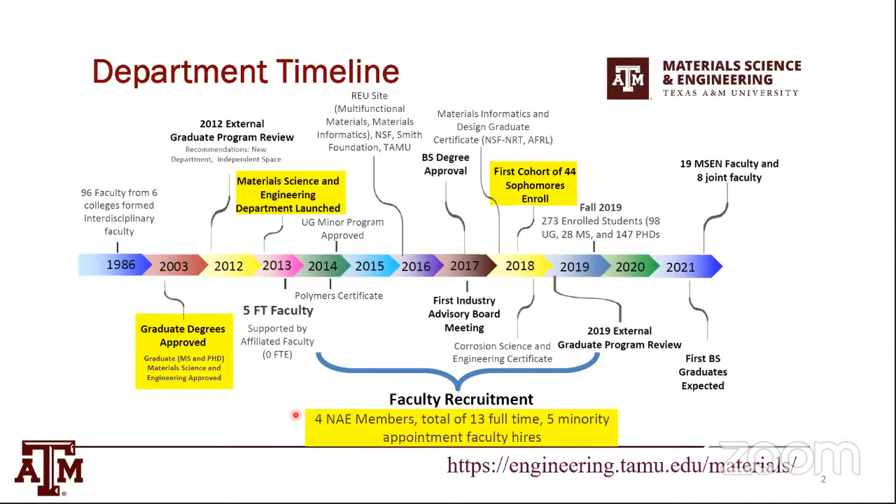Moving on, we have a plethora of research fields of interest to any graduate student: structural materials in the mechanics community, extreme materials for extreme environments, and computational material science, together with experimental mechanics at a smaller scale, largely led by Dr. George Pharr since he joined our department.

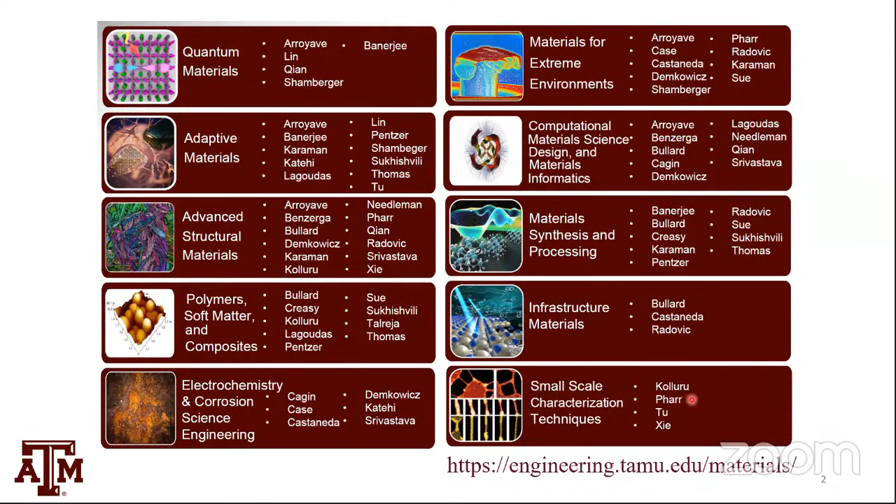As of fall 2019, we have a good mix of undergrad and PhD students, so it's a very research-oriented department with an equal mix. We're now ranked 14 in the graduate program as per US News, among public universities.

As the saying goes: from the outside looking in, you can't understand it. From the inside looking out, you can't explain it. This is pretty much what we know about fracture.

With this statement in mind, I'll summarize what I understand about fracture as an introduction, for maybe one person in this audience who is not actively involved in fracture. So, a simple fracture story.

Let's consider a blob of material, a piece of gray metal or any material that has a crack in it. Fracture mechanics basically says I've got a bad guy, the driver trying to open the crack, and a good guy sitting inside the material trying to resist the crack growth. In Star Wars terminology, I've got the Emperor and I've got the Resistance.

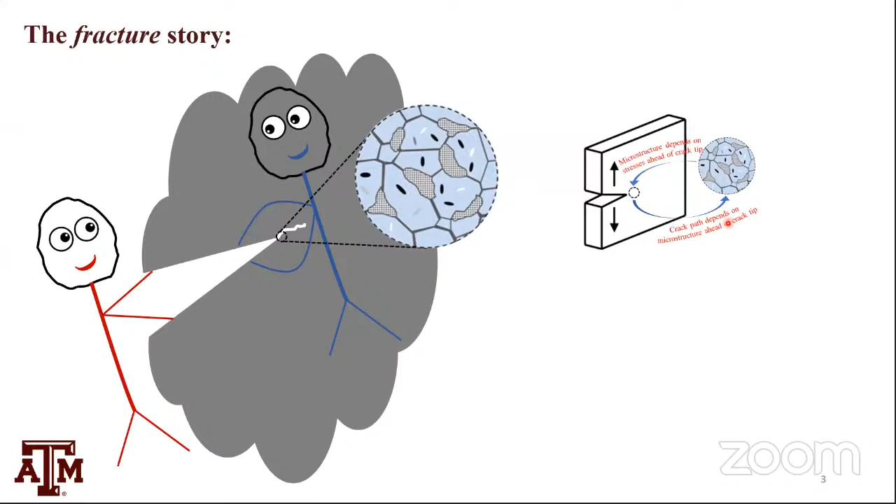So it's a coupled cycle. Which one is affected more will depend on whether we get more resistance or it becomes easier for the crack to grow. More often than not, we know from a material science perspective that a crack in the material follows the microstructure. So microstructure has many roles; it also makes the crack grow in certain ways.

So if we look at it this way, the microstructure is helping the bad guy because there are features that allow the crack to grow easily. But there are also features in the microstructure that trap the crack or move it around. This isn't my idea; it's been around for a long time, through 100 years of fracture mechanics. At least for the last 60 years, everybody has realized the role of material microstructure.

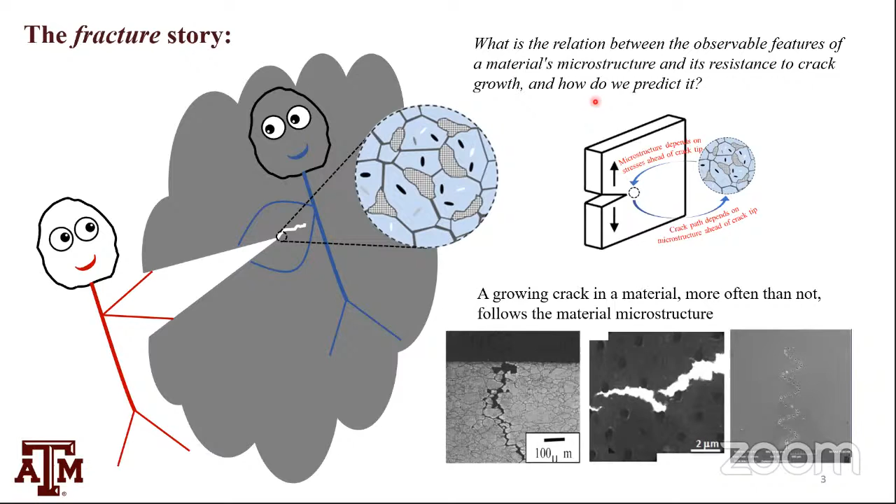So what is the relation between the observable — meaning relevant features of a material's microstructure — and its resistance to crack growth, and how do we predict it? The 'how do we predict' part isn't anything new for what I'm about to present. It's been there; all I have is better computers and better codes to run these calculations. So how do we do it?

Finite element, well known, has been around for a while. What we're going to do is take a specimen, a small scale, mode 1 small scale yielding boundary value problem. I'm applying a loading condition representing mode 1 small scale yielding. I've got a notch and a small region where I'm going to model the material microstructure.

What I'm going to present is a simple microstructure. Either I have these inclusions, tiny particles that nucleate voids, or I have a nice distribution of grain boundaries, and the crack is driven by the grain boundary — that's intergranular fracture. Or in this case, it's inclusion-driven fracture. The matrix of the material is isotropic, elastic-plastic.

The method we're going to use is finite element explicit. We take this, put it into the finite element code, which follows the dynamic principle of virtual work — so, finite element explicit. Why explicit? We're interested in quasi-static behavior, but we use explicit because we're going to simulate crack growth, and it's not easy to make an implicit code converge. So we go with the dynamic principle of virtual work. As long as we follow things correctly in the explicit calculation, we get a reasonably convergent result.

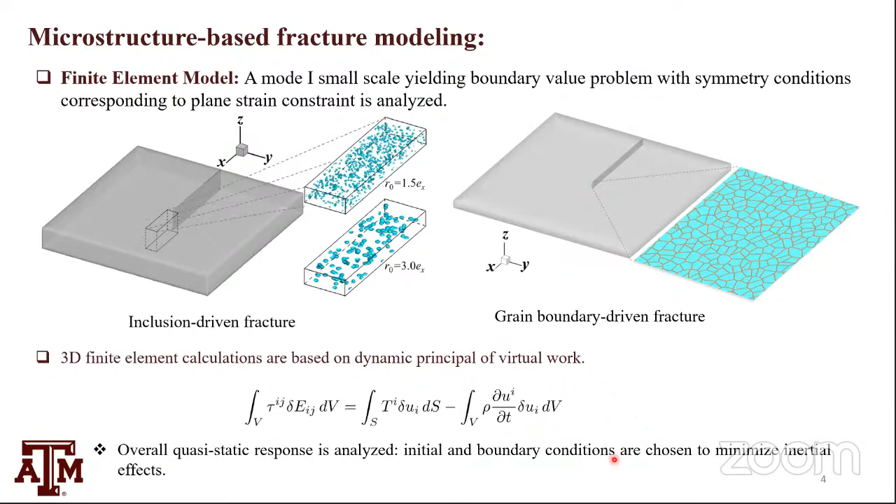Since we're doing dynamic calculation, but we're interested in quasi-static fracture, we apply initial and boundary loading conditions such that it minimizes inertial effects, which is basically the wave effects. So we got the method, we got the model. Now we need the constitutive method.

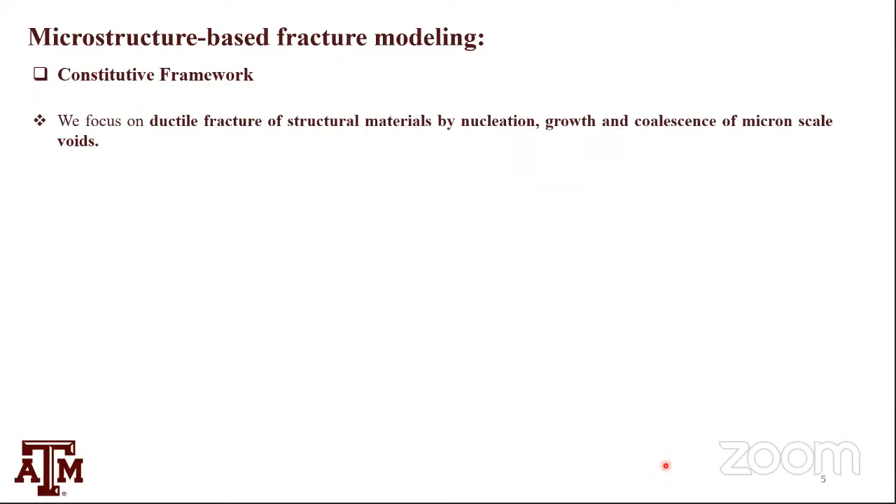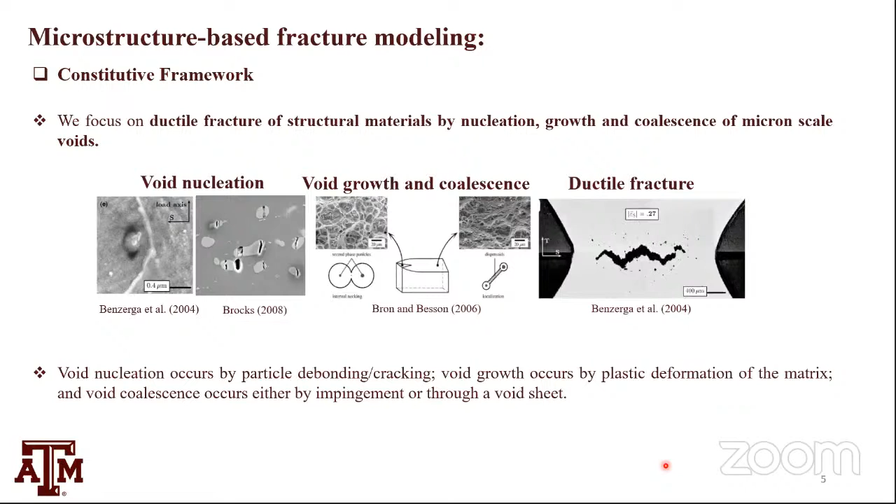So for the constitutive framework, we're going to rely on ductile fracture modeling. This is what I do. We're going to focus on void nucleation, growth and coalescence, and that leads to formation of a crack. So this is the basic premise. And how do we mathematically write it?

It's not new. It started with Fred McClintock and Rice and Tracey's seminal work, analyzing the growth of an isolated void in an infinitely large medium. Later, this was put in terms of a flow potential or a yield function by Gurson in his PhD thesis under supervision of Professor Rice. Once Gurson finished his thesis, two people, Viggo Tvergaard and Alan Needleman, took the Gurson model and put it in a finite element code. In the 80s, they modified the Gurson model, which is now referred to as the modified Gurson model, or also known as the GTN model, Gurson Tvergaard Needleman model.

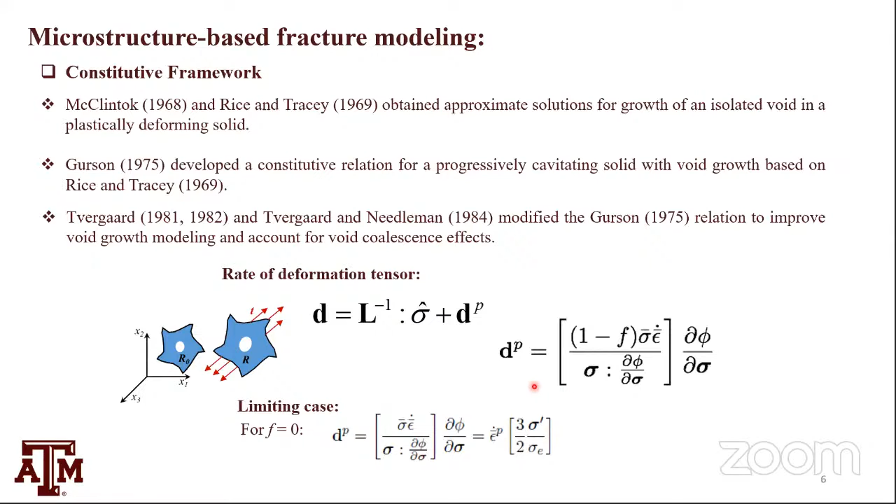Basic, simple idea: we have a material, a pore in it, and for the deformation we apply a boundary value traction or displacement, and we divide the deformation into two parts, elastic and plastic, not a big deal. We're going to modify the plastic part to account for this variable F, which is the porosity or void volume fraction coming from nucleation, growth, and coalescence. This could be also pre-existing in a material. Phi is my flow potential, Mises effective stress, and epsilon bar dot is the strain rate, the effective plastic strain rate. If F goes to 0, this reduces down to a simple von Mises material. So F goes to 0, dP reduces down to plastic strain rate in a von Mises, isotropic von Mises material. All right, how does the void evolve?

The void volume fraction's first part follows mass conservation. Then there's a second part, introduced by the work of Chu and Needleman, that introduces nucleation of voids. So you have this discrete microstructure feature that nucleates voids, these voids grow. This gives you an early jump in the voids, and their further growth follows mass conservation. The flow potential, as was written by Gurson, is here with Qs introduced by Viggo Tvergaard.

This last part is what makes fracture possible from these models. What we have is that this depends not on F directly, but on a pseudo function F star, which is simply the void volume fraction coming from growth and nucleation. But nucleation in a way violates mass conservation, but let's keep it there. F enters here, and the flow potential starts to shrink. When F grows, the flow potential starts to shrink. And if F is greater than some critical value, then this growth of F star becomes asymptotic or near asymptotic, causing the collapse of this yield function rather rapidly.

Before we go on, simply, if this F star goes to 0, you reduce back to a von Mises flow potential. This is actually a flow potential, so I should not have used an equal-to-0 sign, but we have it there, like a yield function.

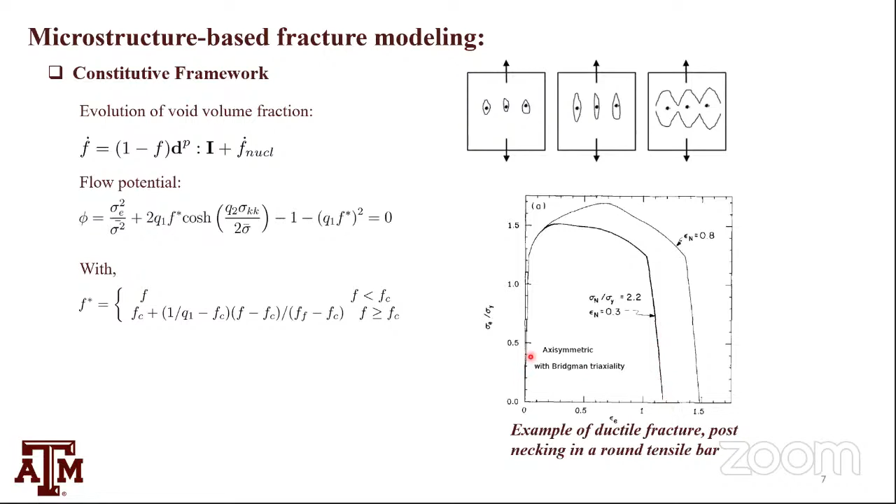So when the yield function starts to collapse, just visualizing it in a simple uniaxial tension term: I have elastic behavior, yielding, strain hardening, ultimate tensile strength, then necking in an axisymmetric bar. Then I have this damage region where the voids start to grow. I reach a point where the majority of material points have reached F greater than Fc. My yield function starts to collapse rapidly and the load bearing capacity drops rapidly, which basically mimics the creation of a new free surface, or fracture.

So with that, I need one more thing: the definition for plastic strain rate, which is a simple power law. It's a very common one. And hardening is, again, a simple power law, metallurgically very old. So we put these two things together, easy.

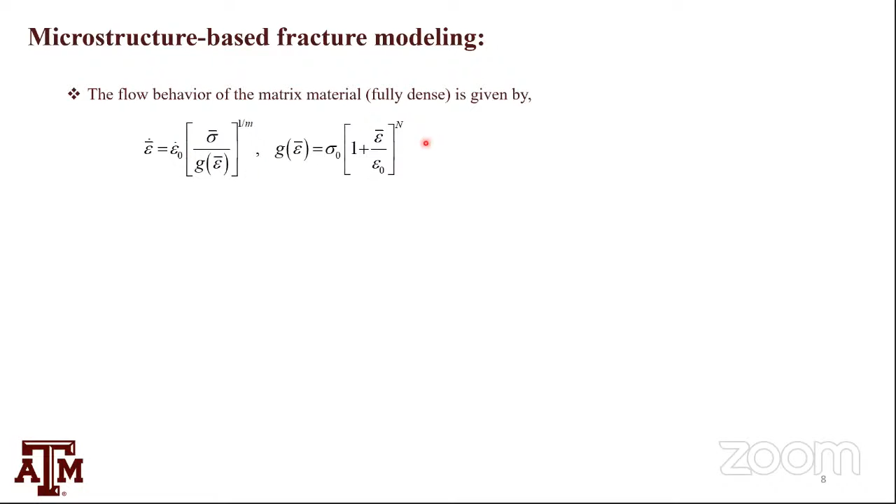Now I need a nucleation criteria, because if I have a microstructure feature, it might not have a void initially, but it may nucleate a void as the deformation proceeds. So I have a material, I have microstructure, and the nucleation criteria follows two relations. Either nucleation can come from accumulated plastic strain, as shown in this material, or nucleation of voids can come from a hard particle or a soft particle.

One follows around mean strain. I have a mean equivalent plastic strain. If I reach that value following a half Gaussian distribution, I nucleate voids. Or, based on stress, I have this driving force: effective stress plus hydrostatic stress.

In summary, it's a scalar measure of the maximum principal stress, a very approximate zero-order approximation, but it gives you a driving force for stress-based nucleation.

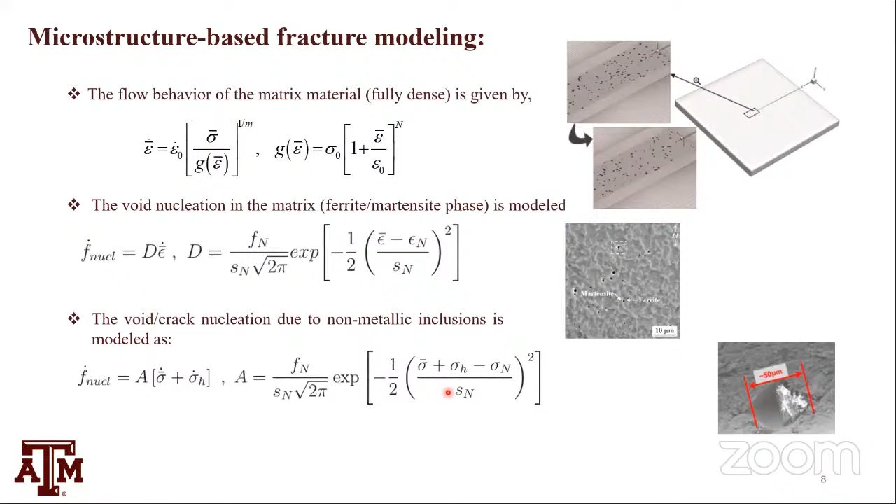With that, it's done. So now in a simple way, I will show Okay, this is, once I have pointer on, it doesn't work. So I need to go back to, all right. So some simple simulation results.

So some simple simulation results, focusing on the small box. I have an inclusion, a notch here, and the crack starts to grow. We can do this for different inclusion sizes. These sizes show double the initial size, and EX is the mesh size.

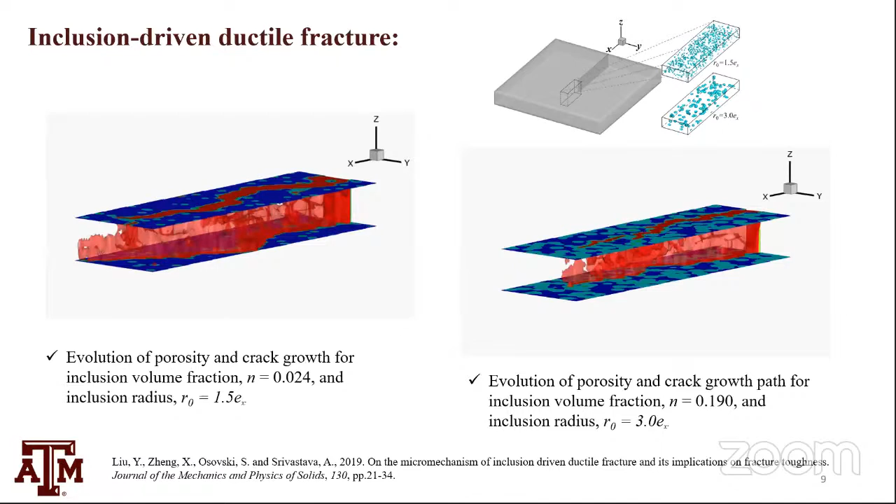We have a volume fraction of around 0.19, a pretty large volume fraction, and we can simulate these three-dimensional crack growth paths. From these calculations we get the JR curve, or crack growth resistance curve, where J is the J integral, the driving force as a function of increment of crack, delta A. Because we're imposing the K1 field directly, we can follow Rice's criteria to get J and plot J versus delta A curves for all these cases.

So we can estimate the crack growth resistance curve like one would in ASTM or simple experiments. These are thin slices of material, but the front and back face of the specimen were under plane strain conditions, so despite the 3D microstructure, it's still overall plane strain. That allows me to define a J1C.

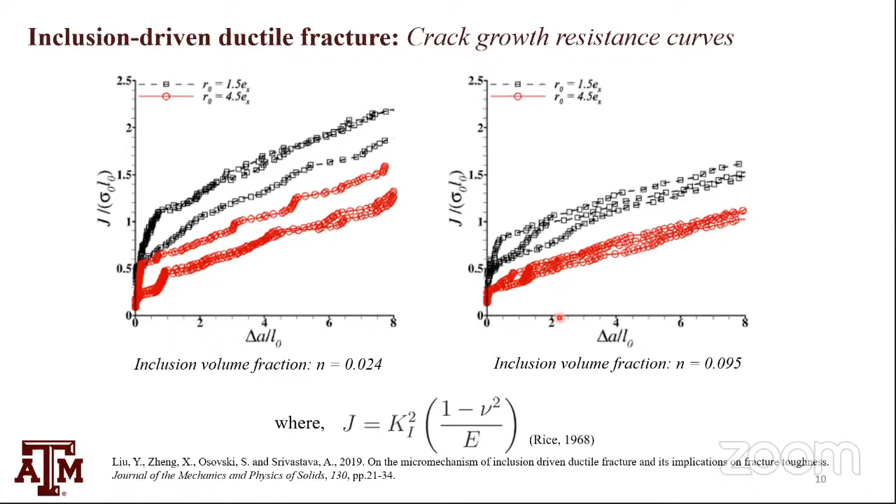I take the J delta A curve, mimic an ASTM standard by fitting a power law, drawing a line, and getting an offset. That gives the crack growth initiation toughness, the J1C value. I can then plot this data against microstructure parameters, correlating crack growth initiation toughness with volume fraction and size of inclusion.

Here is a set of experimental results from multiple ductile materials, not just one set of material. Our model wasn't calibrated at all to match any of these. This could be serendipitous, but it's exciting that the results predicted by the calculation show realistic comparison with experiments. These experimental results were summarized in a paper by Professor McMeeking. So we get a nice, realistic inclusion-driven fracture simulation.

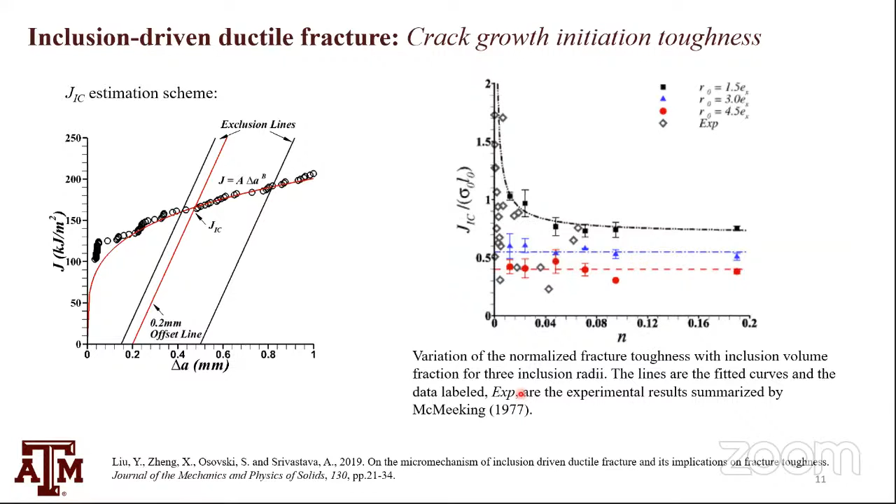Moving on, this microstructure-based approach can also analyze scenarios like microarchitectured materials. This work was experimentally done by St. Pierre when he was a PhD student with Vikram Deshpande at Cambridge. He took a slab of aluminum, drilled a bunch of holes, used a laser to put a notch, and did a 3-point bending fracture test, with one hole or multiple holes. We did the finite element simulation to see if we have a J field and can define fracture properties.

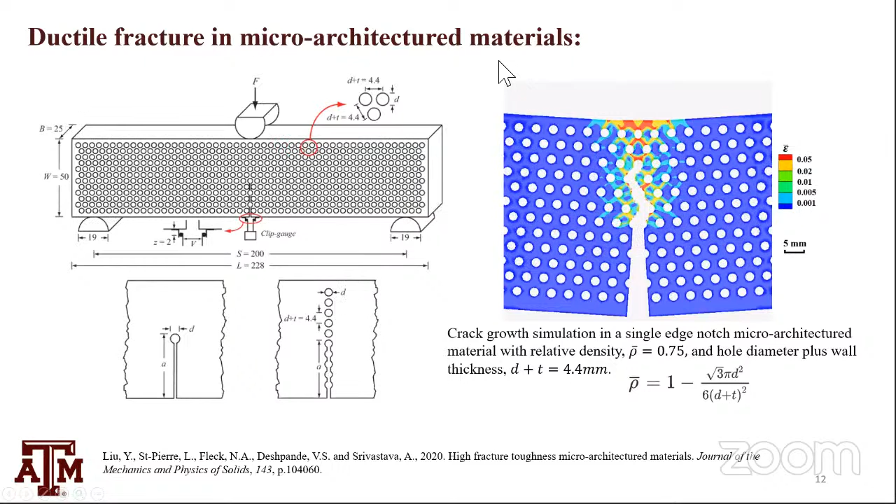So here is a simulation result. We can easily model these voids discretely and let the crack propagate, then plot values with respect to hole diameter and spacing, in a single row of holes and in a hexagonal row of holes, which is the microarchitecture material, looking at its fracture toughness.

In this case I'm comparing results with experiments. This is the single hole case: solid symbols are experiment, and the two open symbols are from applying the ASTM standard procedure to our simulations to calculate KJ1C fracture toughness, or directly measuring by drawing a contour and computing the J integral. Since these are 3-point bending tests, I don't have a K field imposed a priori, so I can't directly compute J, but I can do a simple contour integral. Either way, we get a very nice comparison with experiment for both single hole and row of holes.

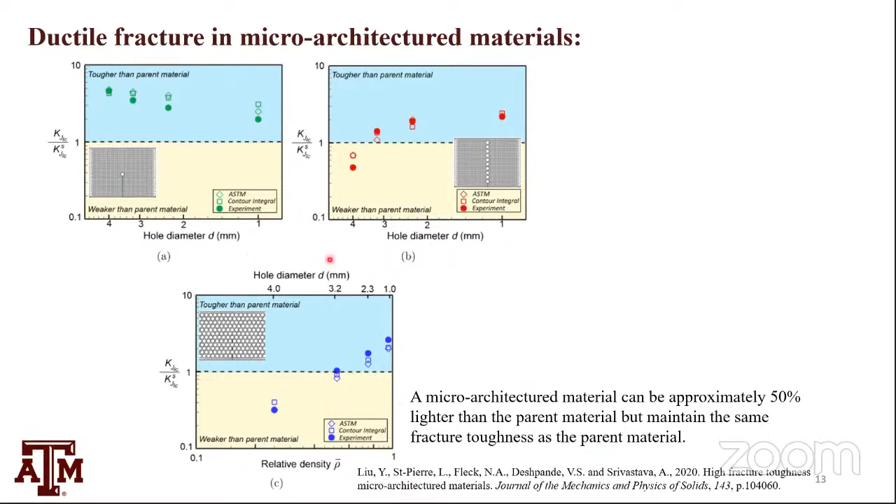In the microarchitecture material we get a nice comparison with experiment, actually slightly better than what we got for single holes. We showed that with this microstructure-based modeling, we could design lattice materials, or architected materials, that are 50% lighter than the parent material but maintain the same fracture toughness. The denominator here is the fracture toughness of the parent metal, which was aluminum 2000 series.

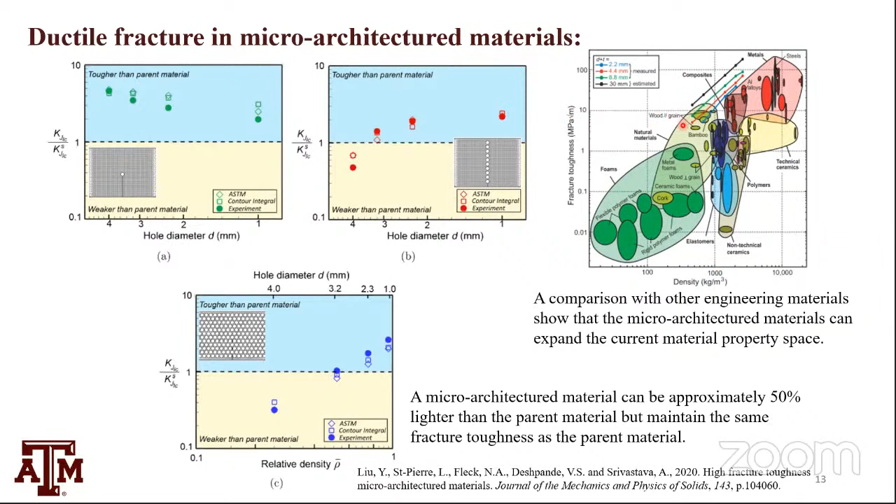Now we can plot a simple Ashby map, where the lines represent our lattice, our microarchitecture material. You can have a material with density less than that of water, 1000 kg per meter cubed, and a fracture toughness greater than 10 megapascal root meter. That was pretty neat in this case.

We also did grain boundaries. We're talking about grain boundaries now. Those holes were a bit of a sidetrack, but we also can do grain boundaries. We focus on metastable titanium beta alloys, where we can simulate crack growth.

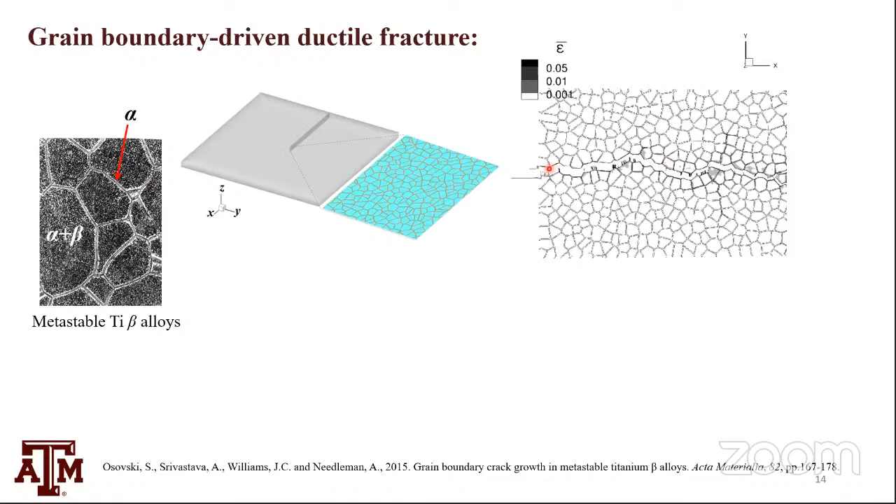These hair-like features are visualization errors, so we just ignore them. And we get realistic crack paths like what you would see in experiments. The crack follows the boundaries of the prior beta grains, basically along the alpha grain boundary.

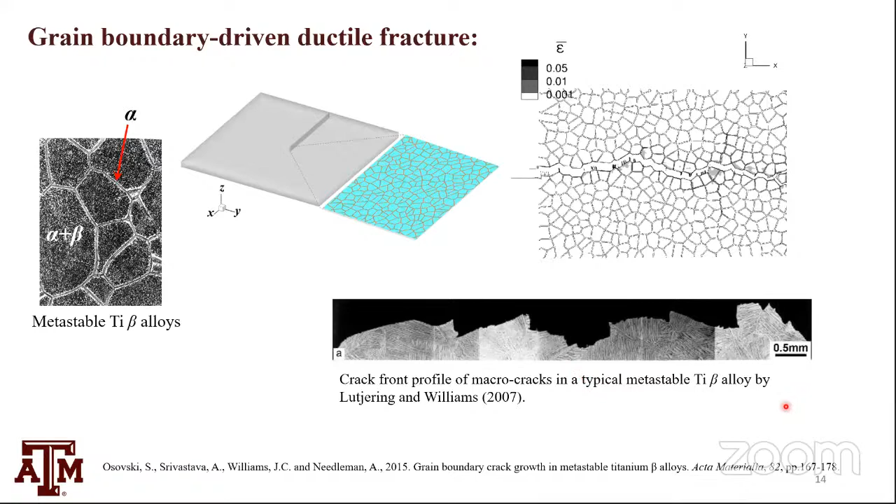We could extract a J delta a curve from this simulation, and get the tearing modulus, which is nothing but a normalized slope of these curves, plotted with respect to strength of the grain, because strength of the grain is something we can control. We can change the precipitate structure in a grain, and in experiments make grains with different strength, and by increasing the strength of the grain we can increase the overall strength of the material by designing the precipitate. But when we increase the strength of the material, we lose something.

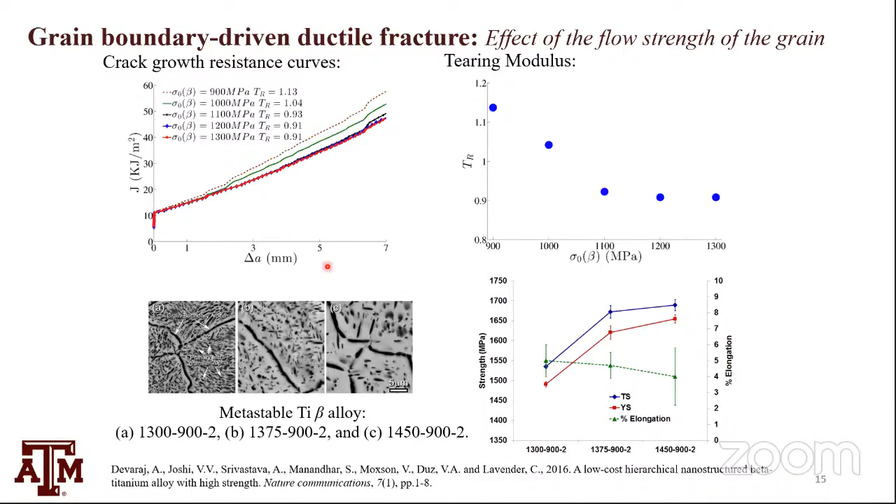So these also provide a nice qualitative, realistic comparison with experiments and inform us. We did this simulation before we did this experiment with Pacific Northwest National Lab.

All right, so simple summary with the microstructure fracture modeling takeaway. The microstructure-based fracture modeling can provide realistic - I say that in quotes because we never really tried to validate these - but it looks realistic, provides a scaling relation, and provides a way of designing.

So realistic prediction of fracture behavior from the material microstructure and material properties is not directly possible if you apply the widely popular, and actually not just popular but widely successful, engineering fracture mechanics based approaches. You can't really get microstructure insight. These methods are not that popular, they're hard and not straightforward, but they seem to have promise.

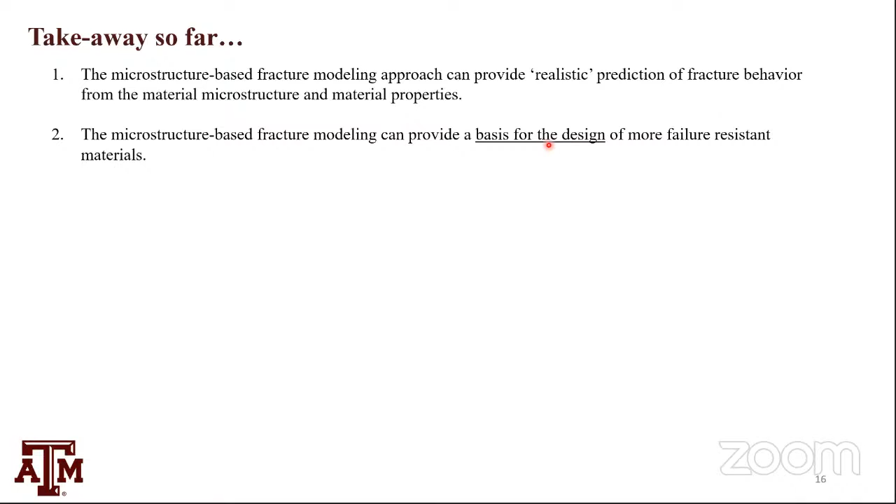These can also provide a basis for designing material, as we saw in terms of grain boundaries, strength of material, and microarchitected materials. Moving forward, we have seen a lot of advances in design methodology.

Basically, the idea of the holy grail of material science is: a designer gives me a target performance matrix, and I come up with a material that meets that performance matrix. That means I've got to solve an inverse problem.

Now, a lot of focus has been on improving elastic modulus and yield strength of the material, nothing much, and nothing on high toughness. The few papers on this topic focused on getting, in a homogenized sense, how much volume fraction of inclusion I should have.

But there is little work done in that regard, largely because optimizing microstructure to enhance a material's crack growth resistance requires optimizing the topological features of the material microstructure.

Now, topology optimization is not a new thing. It has been around for a while in the aerospace field and in civil engineering, but those topology optimization approaches are structural topology optimization.

Now, the question would be, in terms of a computational mechanics person, what's the difference between structural topology and microstructure topology? Not much. The only problem is that it's just too complicated at the microstructure scale, because the constitutive models are complex, modeling requires very fine meshes, and it becomes rather complicated, meaning the calculation becomes expensive and not really realistically doable.

So we cannot really use the microstructure-based fracture modeling I've shown so far with any of these optimization schemes, which are generally iterative, to solve this problem and design a material with higher or enhanced fracture toughness. It just becomes unrealistic. So there is a need to develop a computationally efficient fracture modeling scheme to correlate material microstructure and its crack growth resistance.

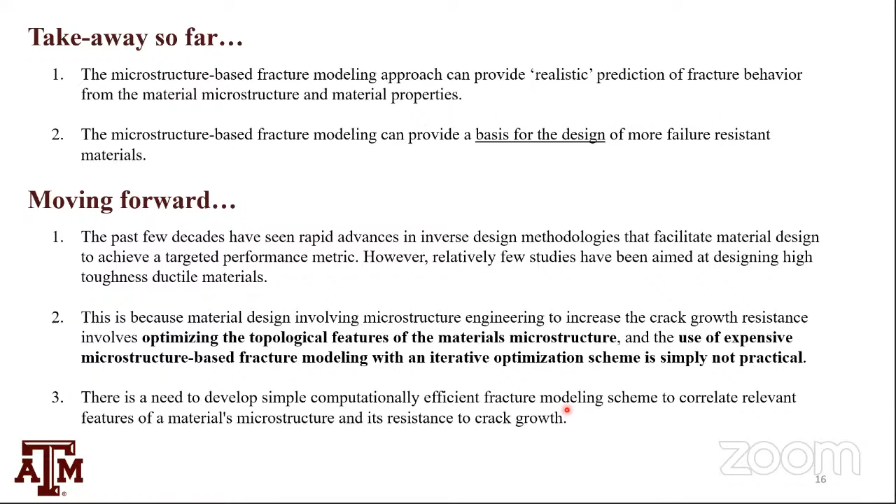So that one could really use it in designing. And also, these microstructure-based calculations are only accessible to people who have optimized codes and access to good computational resources.

As I talked about before, simple and intuitive: cracks follow microstructure. So all we need to do is find the crack path and estimate the energy invested in following that path. That's all we need to do.

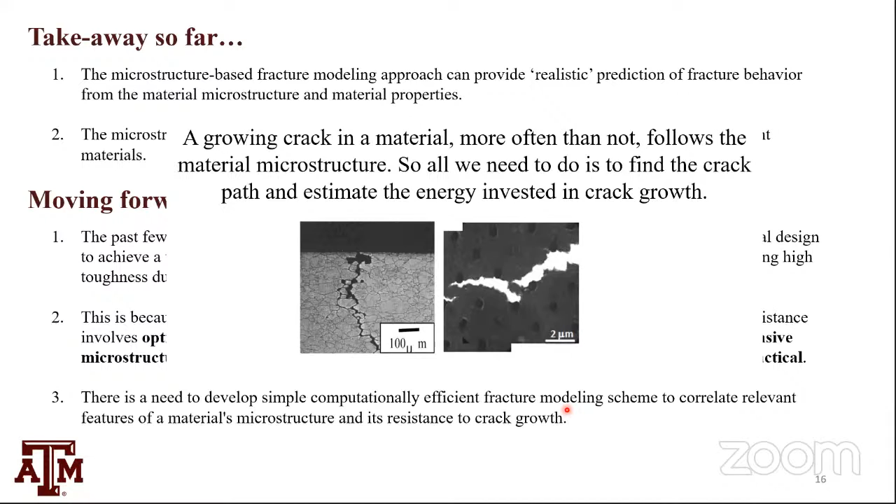So do we really need to follow the full-field boundary value finite element problem? Maybe, maybe not, but it seems like you can get away with just doing a path search. So how do we do a path search?

We picked the North Gate canteen, which is at the entrance of BARC, at the gate of the Bhabha Atomic Research Center. So we go from North Gate canteen to Gateway of India. Plug in these two locations and Google Maps gives me a path. Done - pretty easy, straightforward. It also tells me the shortest distance path, depending on the features you have in your Google Maps app, shortest time path, and estimated time of arrival.

Now, the total time taken, the estimated time of arrival, is analogous to crack growth resistance. The time comes from the resistance itself, which is like traffic.

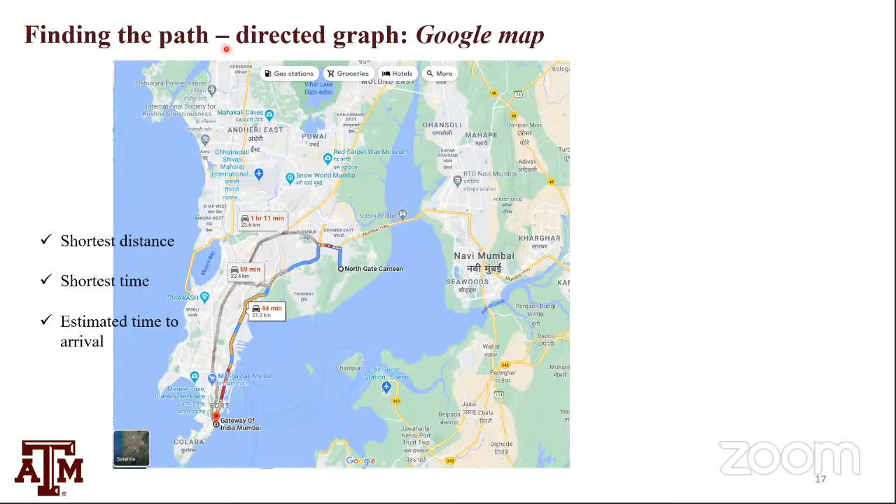I have a well-defined network of roads. Google Maps just picks the path - if you put a time biased path, it does a weighted directed graph. If you just ask for shortest distance, it does a directed path. So Google Maps can do it, we can do it. All we need to do is find a path.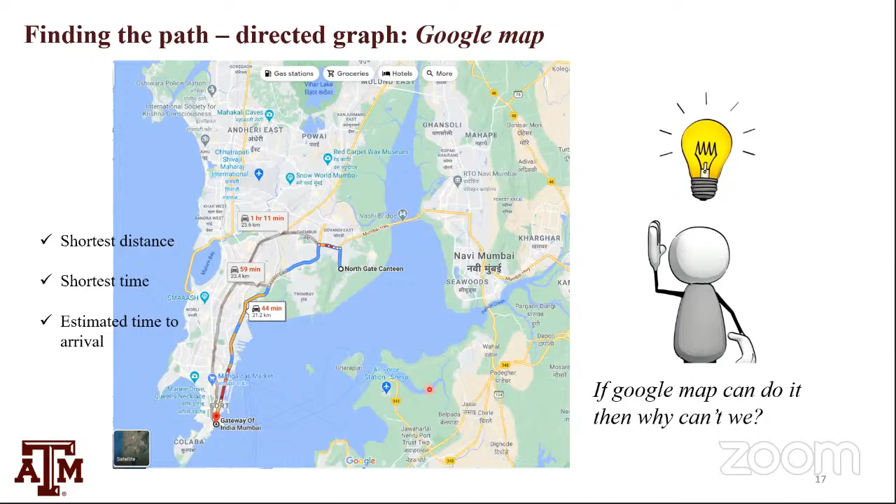So let's see what are the challenges in actually mimicking a Google Map for fracture. Here is my small scale mode 1 problem - it's a large level specimen, small scale loading. I've got a notch, I've got a material here.

Remember, Google Map searches and finds the optimum path in a well-defined network. Highways are well-defined, and Google Map knows where the highway is between a source and a target - your starting point and your end point - based on a certain criteria: shortest distance, shortest time, and so forth. So Google Map has these two.

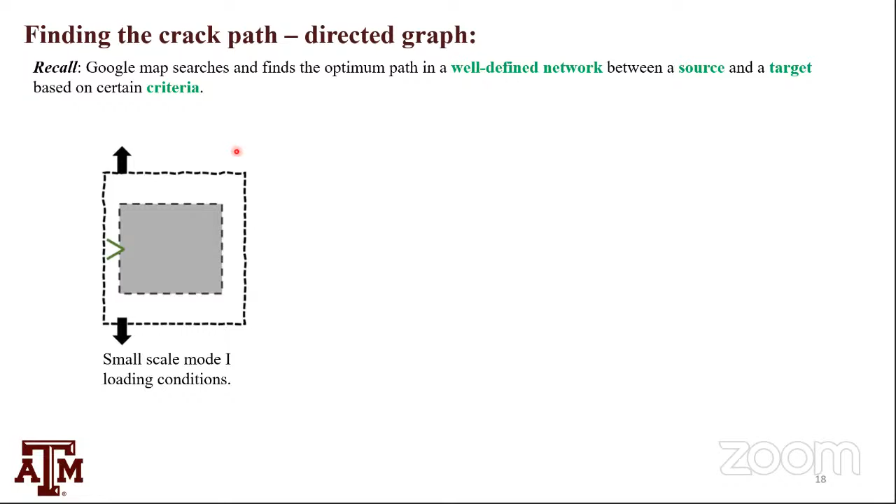So let's focus on one simple microstructure, a case of intergranular fracture, grain boundary driven, when I have a connected microstructure. Do I have a source? Yes, we're doing mode 1, so I've got a crack tip, I know my source. Do I have a well-defined network? Yes, I'm saying my crack will always follow grain boundary, and I'm just focusing on 2D, so I've got a nice well-defined network.

Do I have a target? No, I don't know where I'm going. The crack doesn't know a priori what's going to end up on the right side. Do I have a criteria? Well, we don't know yet.

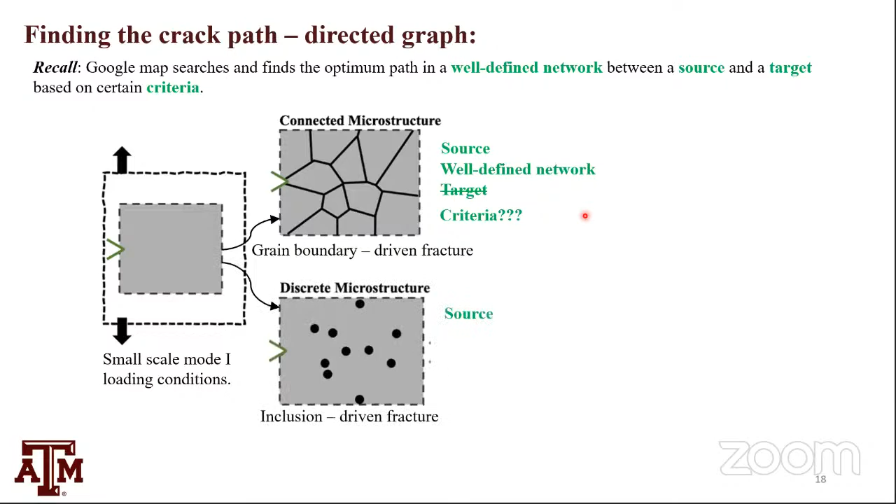Now if I go to a discrete microstructure, the second part I was talking about, inclusions - do I have a source? Yes. Do I have a well-defined network? I don't, I just have a point in an open field. Do I have a target? No. The criteria? Well, we don't know. So what do we do? It's a hopeless situation.

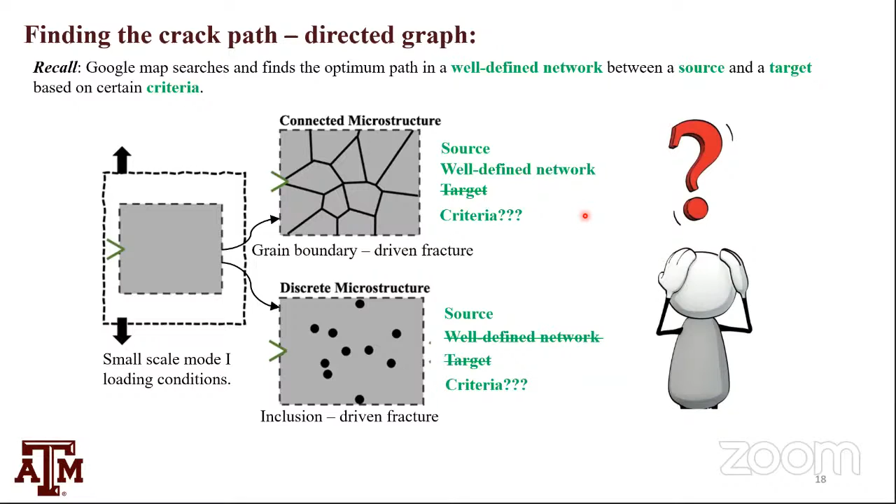But instead of giving up hope, let's start one by one. Let's make my problem similar to the Google Map problem. How do I do that? Just for the sake of validity and developing a hypothesis.

I'm going to focus on this where I had no target and I don't know my criteria. I want to build a path. And how do I know where my target is? Let's do one thing - let's solve a finite element problem, a full field boundary value problem, and see where my crack is going. So I get this solution from a finite element problem, similar to what I was showing before.

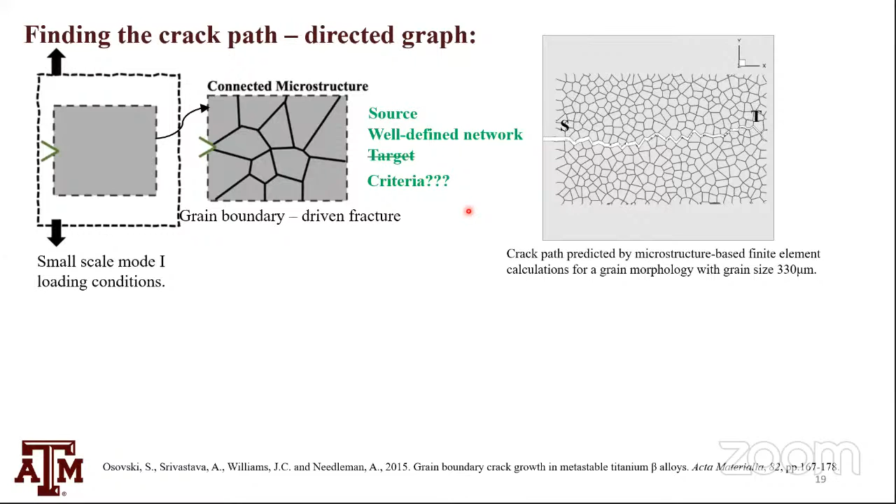It's the same piece of work we've been doing since 2015. I have my source, and now let's pick the target from the finite element path. Once I have my source and target, I need a criteria.

So what I'm going to say is, by representing each grain boundary junction as a node - all these triple junctions as a node on a directed graph - movement is only allowed in the increasing x-axis direction, together with the knowledge of energetic cost of propagating the crack between the two nodes. Now just keep in mind, we'll come back to this one.

That means I somehow know the energetic cost of propagating between two nodes, which is each grain boundary step, or edge, or facet. So just keep in mind, we'll come back to discuss more. But for now, let's assume we know this thing, and we need a simple criteria.

So what we're going to do is find all possible crack paths, and their crack growth resistance curves can be calculated utilizing a graph search algorithm. If I have a criteria, I can do it. This is what Google Map does.

If I know the cost of every step, that's the traffic on every piece of road - if I know that, I can build a weighted graph and find the path. Simply the algorithm Google Map follows. I do need the criteria though. I don't know shortest distance, I don't know shortest path.

Richard Feynman once said, if you give me all the possible paths between A and B, I can tell you the path of shortest energy, minimum energy. So let's draw from that. And since I know all the paths, I can find the path of least resistance between S and T.

Now this is the crack growth - the black line is the crack growth resistance curve predicted from finite element, and red is the path of least resistance. It underpredicts the total crack growth resistance, and it underpredicts more and more as we keep going on. That means the crack does not follow the path of global least resistance.

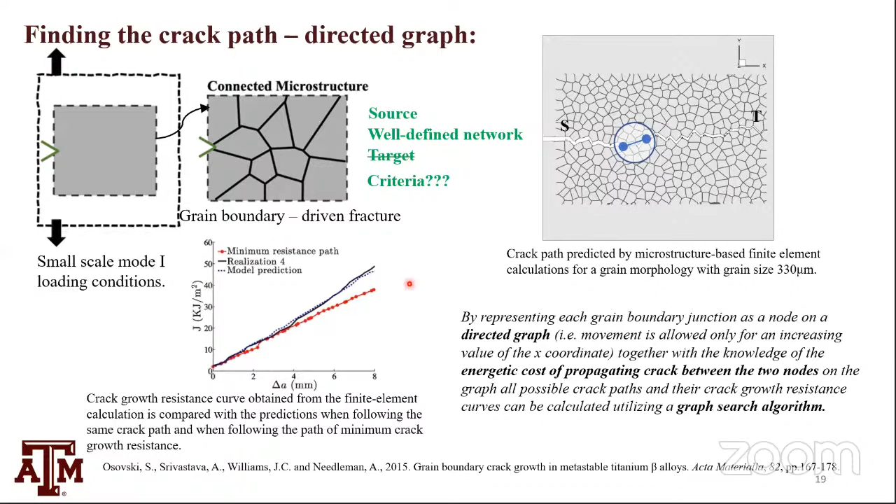If I do that, this is the blue line, and it matches. So if I know the unit cost of propagating each step and I know the path, then I know the curve. I don't know the unit cost yet, and I don't know what gives me the path yet. So I don't know. But if I know those, I can find out.

So the crack growth resistance through a microstructure network can be described by microstructure-specific discrete unit events, at least in circumstances where I know what feature the crack is following. And for a given crack path, the crack growth resistance curve can be calculated using the crack growth resistance of a collection of unit events.

This is what we believe as a material scientist or engineer. This is what I just showed you is possible, if I know.

The crack path through a microstructure network is dictated by the local minimum crack growth resistance at each microstructure-specific discrete unit event, and not by the global minimum crack growth resistance.

This is something that, once I tell you, and once we talk about it for 30 seconds, becomes obvious. It's not something we're pulling out of thin air. It's obvious: the crack doesn't know where it's going, the crack knows A, the crack doesn't know the target, doesn't know B, but the crack knows what is immediately ahead.

So the only difference is that A and B are really close apart — the distance between the next possible microstructure-specific event. I still need to find out what the local minimization would be; that we don't know yet. And how do we define these specific discrete units?

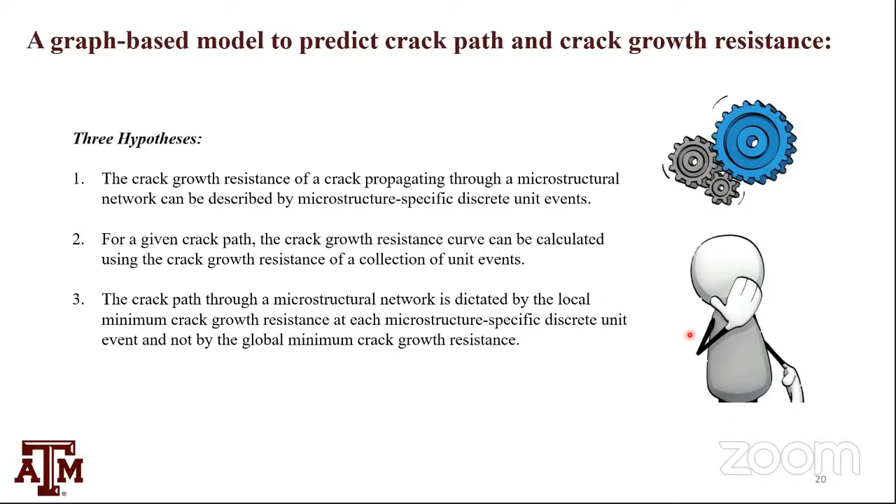All right, moving on, let's focus on the most complicated case, where we know only the source, we don't know the target, we don't know anything. So let's take these discrete unit events and build a graph. We can't build the graph like Google Maps does, because we don't have one. So let's come up with a graph.

How we're going to build the graph in this case is just by relying on what we've learned so far. We know that 2 times the mean inclusion spacing is what dictates the fracture toughness, from 3D calculations I did and published in 2014, and from work done by Rice and Johnson decades before that, showing that between two voids, 2 times the mean void spacing tends to dictate the critical crack tip opening distance.

So, okay, let's focus on a small piece of the microstructure at a time. I'm only going to focus on a region that is within 2 times the mean inclusion spacing. Now I have certain inclusions, and I'm going to connect all these inclusions with direct straight lines from my crack tip — drawing these vectors connecting my source to all these points.

I'm just drawing three here. So I get this P number of points, which are a subset of the total inclusions that lie within this 2 times mean inclusion spacing. I draw these arrows, which are my edge vectors, E_j. Now, once I have these edge vectors, I momentarily have the graph, right?

Then if I have a connected microstructure, it's even easier, right? In this case, I have only two possibilities — each of these are triple junctions — so I have only two vectors, easy to define. So I can build my graph part by part by part.

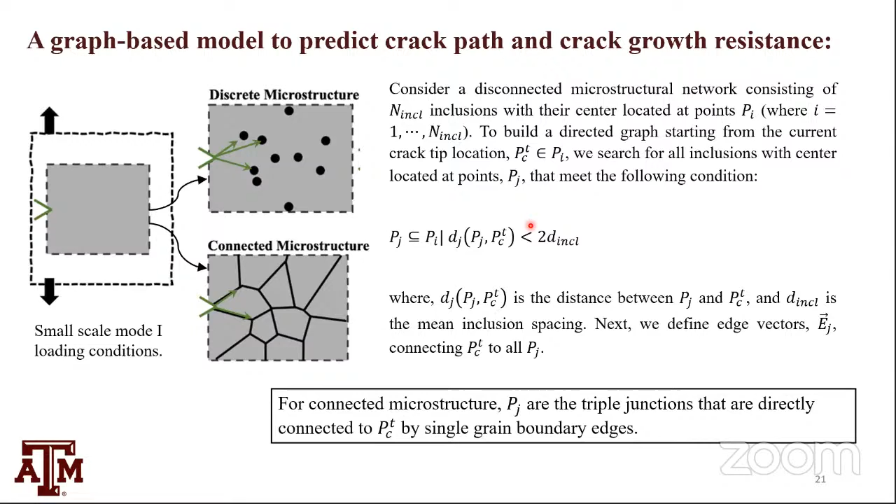In this case, I'm just focusing on what is immediately ahead — the two edges — and on what inclusions lie within this 2 times inclusion spacing. Now, this factor of 2 is really rooted in the mechanics of fracture mechanics that we know to date, correlating microstructure and crack growth resistance.

All right, so now we need to know how the crack propagates. Now the crack propagation in this case, we'll define simply that the edge vector, out of the 3 vectors that I drew, or 4 or 5 that could happen, that could be drawn within the limit of 2 times d inclusion, the crack chooses the vector at time t plus 1, which basically gives the minimum value of this function g.

This function g is basically related to dj, the increment of crack growth resistance, which should be a function of the distance between the two and its angle of inclination. The distance is nothing but the magnitude of these vectors, and the angle is the projection of these vectors in the crack growth direction x1, which will be straight ahead. Projected crack growth is what matters.

It's going to break my specimen into 2 pieces. Once I know all these vectors at every time step, I can sum up their projection, and that gives me my projected crack length, which is what we measure in experiments or rely on ASTM analysis. Once I have all these unit events of these G's, I can sum the total of them, and that will be my J at any given time T.

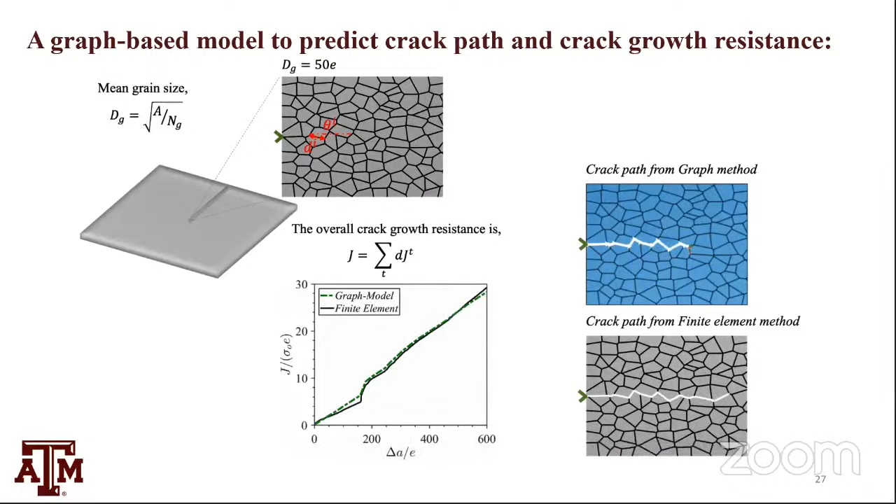Again, but every time I reach a triple junction, I have to pick this or that, and it does pretty good. In grain boundaries, we most often end up picking what we want. Again, these are 2D calculations, 2D predictions. We're not at 3D yet, neither is Google Maps.

We already moved the algorithm beyond one day at a time, one thing at a time. So I'm just showing more demonstration. It's not only simple grains.

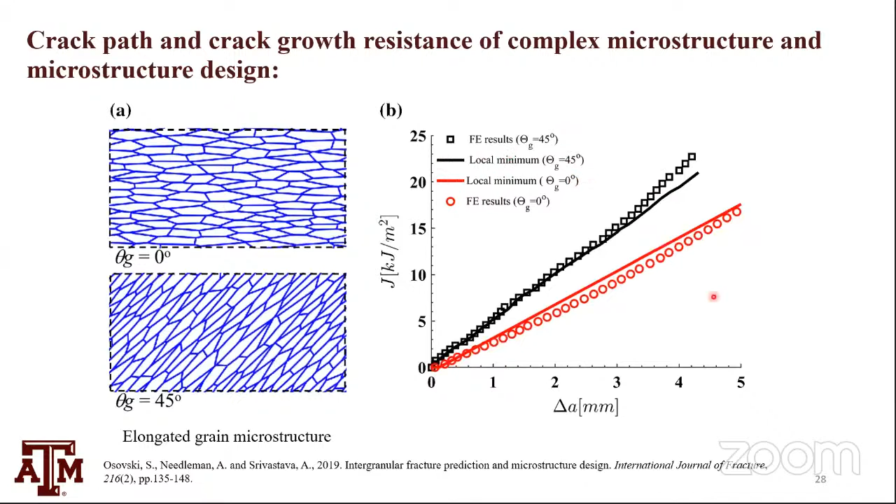We can have anisotropic grains, elongated grain microstructures, and we can still predict nicely. These are elongated grains. My crack started from here, on this side. And this one, crack is still here. I rotated the elongated grain by 45 degrees and this nice local minimum shows the model prediction, and then these two are FE results. Works very nicely, even for very anisotropic grain structures.

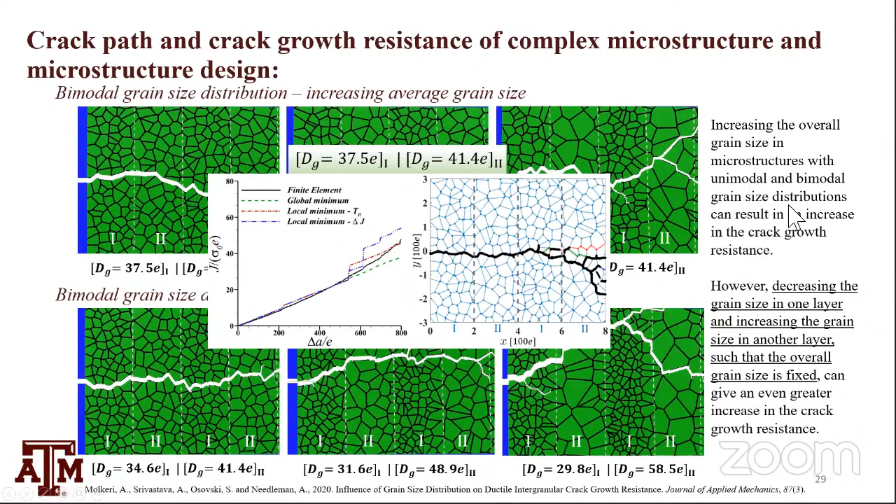We also came up with the obvious answer: if you increase the grain size, toughness increases. We've known that for 50 years. But we also came up with the non-obvious answer that decreasing the grain size in one layer and increasing it in another layer, so that the average grain size stays fixed, has a greater effect than just increasing the grain size as a whole. This second part is important because sometimes we need strengthening from the finer grain, and we can then get toughening from the larger grain.

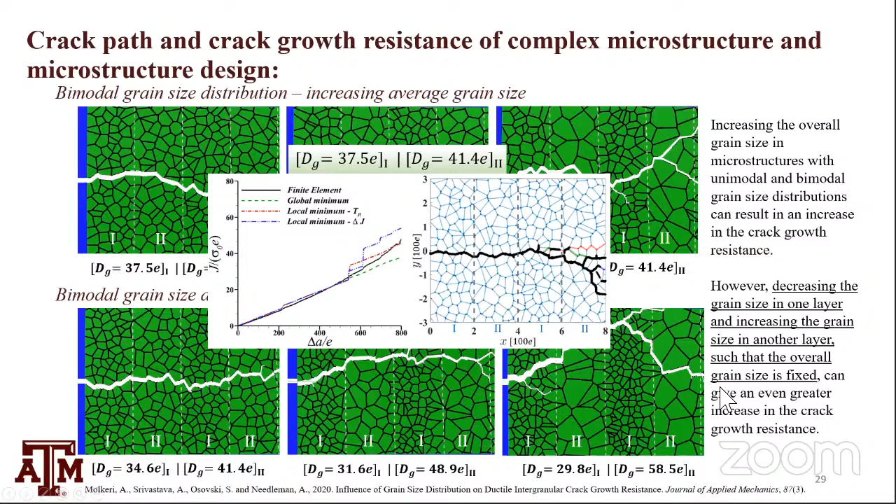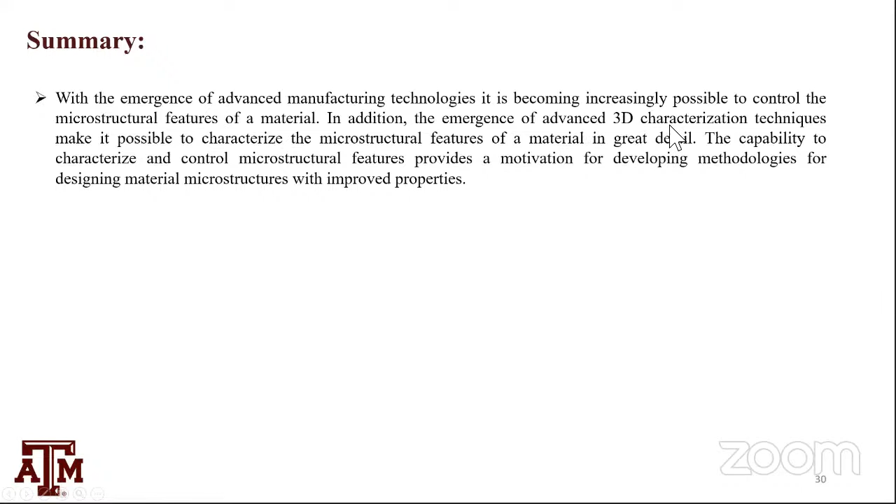Now, in summary, we have the emergence of advanced manufacturing technologies. It is becoming increasingly possible to control the microstructure features and characterize them in 3D. So we need simple techniques to correlate microstructure and crack growth resistance and crack path. Simple models like the graph search can be really good to design microstructures that we can then make, or characterize the toughness of a material using these advanced characterization techniques.

Now, our simple and computationally inexpensive model correlates relevant features of a material's microstructure with resistance to crack growth, and it can be easily used in iterative and non-gradient optimization schemes. Additionally, the model can be used to predict the path and resistance of any crack growth process that discretely propagates from one micro feature to another.

I saw there was a question. Sometimes Google Maps sends me to a road closure or circling paths, from Vigneshwaran. So the question is, how does your method guarantee the crack actually propagates to some unknown target instead of going back?

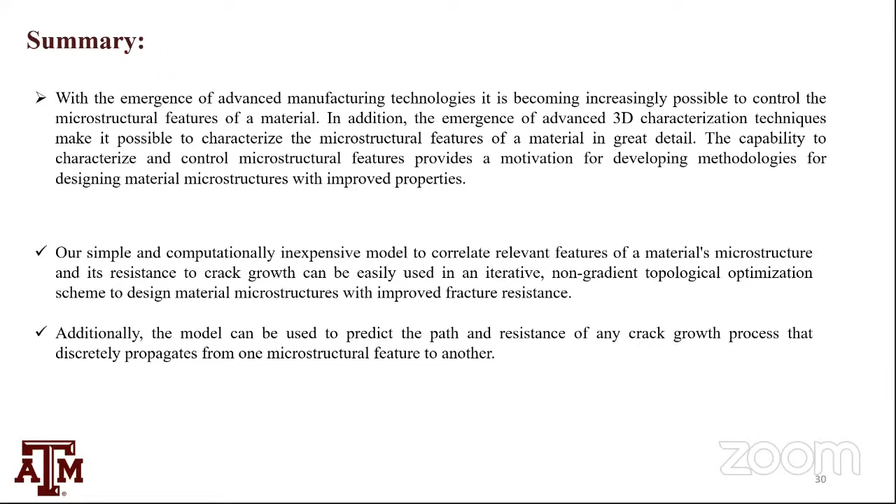The reason I'm answering this question is because this happened to me as well. You're not alone. Google Maps once took me on a joyride, a 10-mile detour, turning around multiple times, when all I needed to do was take a U-turn.

So the hope would be that this method can allow for that. Right now, this method would not give you that. I guarantee the method wouldn't predict this because it can't. It's a directed graph, it will always move in the forward direction. Google Maps only gets confused when you try to take a U-turn.

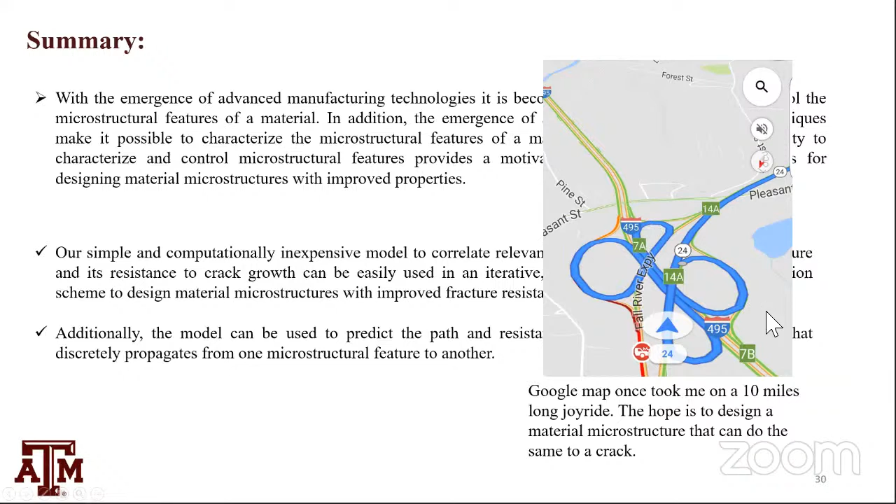Can we make this Google Maps confused by designing the microstructure? Can we make the crack follow this path? So that's pretty much it, what I have.

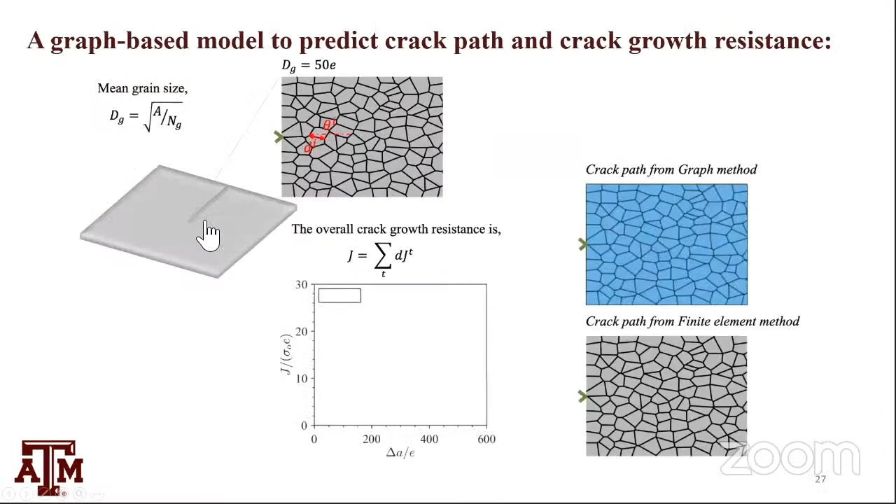So the other question I had was regarding the G function you showed, used for the local graph search. I believe G is the energy cost associated with choosing each particular branch. I can imagine it's easier to come up with this G function for a brittle fracture problem, whereas for ductile fracture, the major contribution to the energy cost also comes from the larger plastic zone. So how would you choose G for a ductile fracture problem? Is it calculated computationally, or how?

Yeah, you're right in that. This was the interesting part - the same thing came to our mind. This is ductile fracture, right, so the matrix follows Gurson, and we did this calculation. But this is small scale yielding. You're still right that we have a scaling of plastic dissipation. So we were shocked - why did it work when we started to sum them together? Even in the grain boundary case, why did it work?

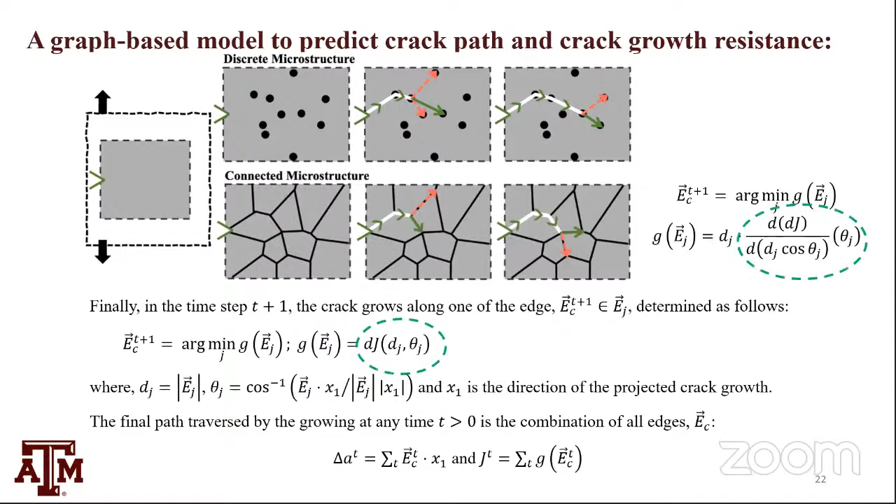The point is that the summation kind of worked because the dissipation follows a power law. The plastic dissipation will in some way follow a power law as a crack keeps growing. But delta J stays the same way and it adds up. So if I grow the crack from 0 to 1, I have an increment, a jump in J, from 0 to 1. In this case, 1 to 2 shown here - this jump is basically what we're getting. And we add when I go from 2 to 3, 3 to 4, 4 to 5. I'm not running the crack all the way and doing separate calculations - my unit event is always this, and I'm only changing D and theta. So the plastic dissipation is also in an incremental form, and that tends to capture the addition of the plastic increment as well.

But I still don't have a very good explanation - I'm still with you, I understand your point, and I have the same question myself. Why does it work so well? We add up these delta J's and they seem to produce the total J versus delta A curve, where the explanation of rising delta J in ductile fracture comes from the idea of large-scale plastic dissipation. It seems like every time this plastic dissipation we capture in every unit event also adds up. But then why does it add up in a linear fashion when it's a power law? We still need to look more into the analytical part to understand why it works, if it works.